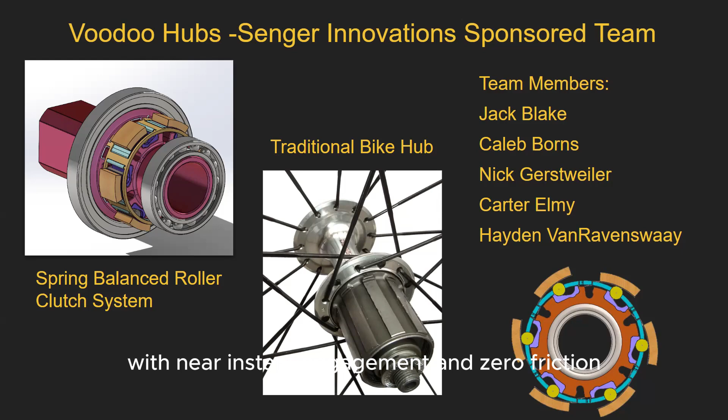The end goal for Senger Innovations is to create a real bicycle hub that is competitively priced in the high-end bicycle hub market, with near instant engagement and zero friction. This would target cyclists in competitive mountain and road biking. Achieving this goal is a long process, and we have been happy to help along the way.

This past year, our team has worked on further developing different testing methods for the bicycle hub with drag, life cycle, and sound testing, as well as computational models for the dynamics of the hub. This has included a lot of research in components, learning how to develop code to run tests, and many different design changes to accommodate for the high loads during life cycle testing.

Our members have also focused on dialing in proper sound testing procedures to reduce resonances and variables to isolate sounds produced by the hub. We are looking forward to continuing to help Senger Innovations by conducting more validation testing and computational models to make sure this product gets to market.

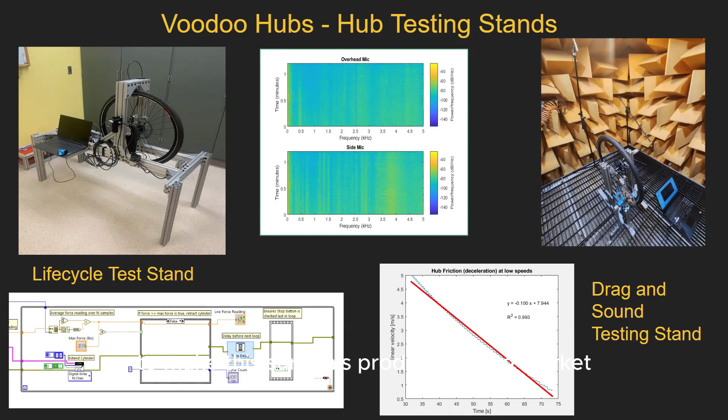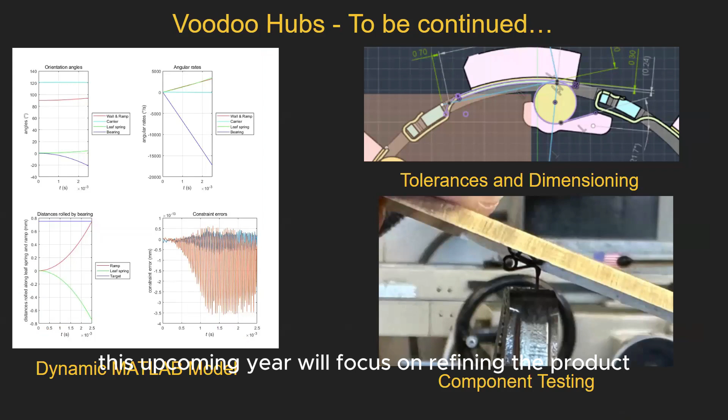The future scope of this project is to have a fully functioning prototype by next year with the help of MATLAB dynamic models, advanced machining, and tolerancing. This upcoming year will focus on refining the product and putting it up against some of the high-performance hubs already on the market. Following testing, the team will improve upon the design, get ready for rider testing, and manufacturing for the market.

The Trailblazer team was formed this year. Starting over the summer of 2023, we began this project by completing customer discovery interviews with local UP trail builders in order to identify common issues that contractors often encounter, in search of an engineering product and solution which would later be suitable to bring to market. The issues that often arise are transportation and mobility of essential components such as tools and fuel. This issue set allowed us to focus our sights on designing a trailer for deep forest trail building.

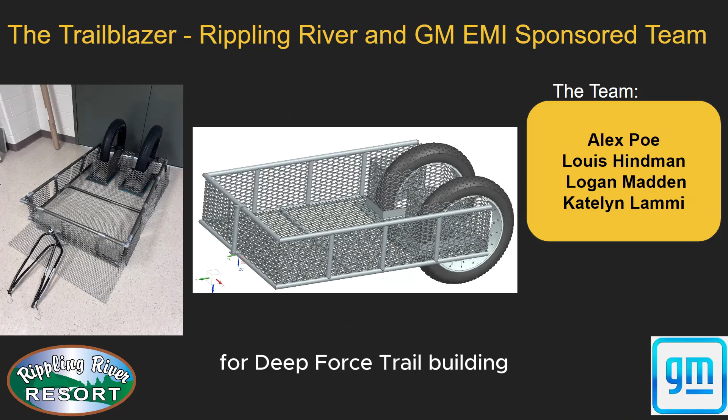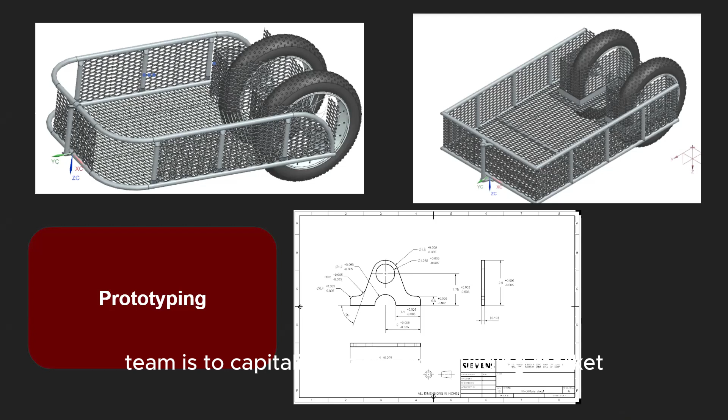The Trailblazer team today includes 4 mechanical engineers, myself, Logan, Louis, and Katelyn, who share a goal of creating a maneuverable, durable, and easy to maintain bike trailer. With commercial bike trailers often designed solely for road usage, utilizing only a singular wheel with small body frames, they often lack trail mobility and adequate storage space, while also costing between $400 and $800. The goal of the Trailblazer team is to capitalize on the trail building market with a cheap and reliable product targeting the labor market who will be able to benefit from our project.

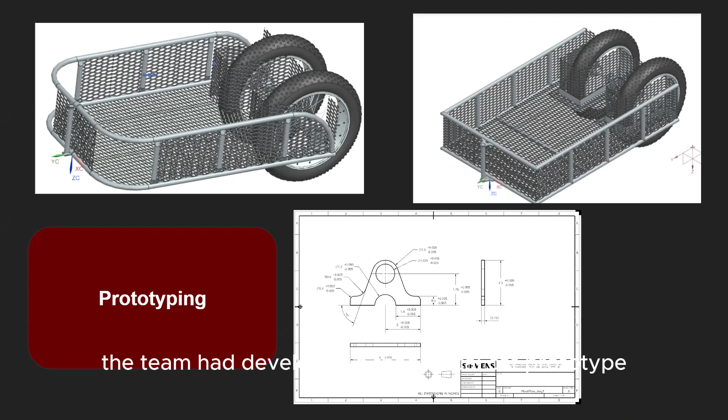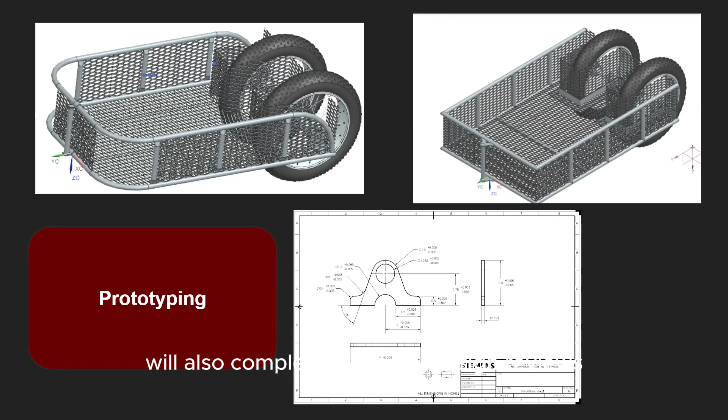By the end of the 2023 semester, the team had developed a theoretical CAD prototype. However, throughout the semester, our team faced a series of challenges due to a lack of efficient design experience, which would prove to be a rather large learning curve. As a result, our designs would often be faulty or unable to be manufactured. To counteract this issue, our team would reach out to both university faculty and our advisors at General Motors for feedback and advice, while also completing internal design reviews, allowing us to review each other's work and identify potential issues before we manufactured.

This spring semester, the Trailblazer team shifted our attention from research and development to manufacturing the proposed design. This in turn saw us completing engineering drawings, allowing us to machine necessary parts. However, this shift in focus would generate some problems for our team, as not every part was feasible to manufacture within the Michigan Tech facilities.

One such example is represented in our initial proposed idea for our trailer's frame, which was supposed to have 2 90-degree bends in order to create a bent frame. However, we realized no machine at the university or any local manufacturer would be able to produce such bends. As a result, we needed to redesign our prototype to be composed of 2 45-degree cuts instead. This would prove to be a satisfactory result. As of finals week in the spring semester, the Trailblazer team has fully machined every component present within the prototype models and has shifted our focus to completing the weldment of the trailer frame, with a final product expected by Design Expo.

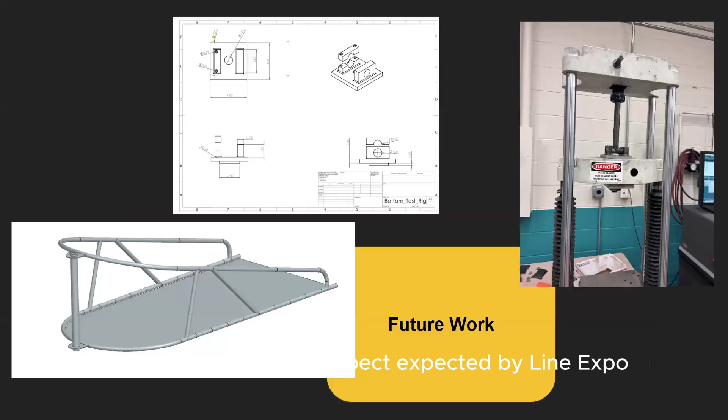The Trailblazer team has no shortage of future work to undertake. Starting off next fall semester, our team plans on completing rider testing at Michigan Tech trails to determine how well the trailer handles and possible adjustments that would need to be made. This will entail riding on cross-country and downhill trails with some parking lot testing to determine how well the trailer

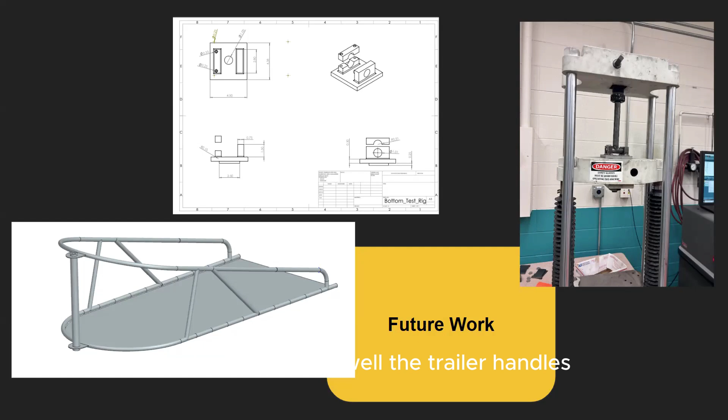handles. Further work will include researching material change from our current standard bike steel to aluminum in order to reduce overall weight, while also researching tensile testing and other joint connection methods.

Our third enterprise team, composed of mechanical engineering majors Ben, David, and Cooper, is tackling a common frustration for cyclists and bike mechanics: messy and time-consuming hydraulic brake bleeds. Enter ABBA, their innovative solution that automates this process.

Most modern bikes rely on hydraulic brakes, offering fantastic performance. However, bleeding them can be a nightmare for both professional mechanics and home enthusiasts. ABBA solves this by automating this process, making it quick, clean, and user-friendly. This portable, battery-powered device utilizes a clever peristaltic pump. It gently pushes fresh fluid through your brakes, eliminating air bubbles and ensuring optimal performance.

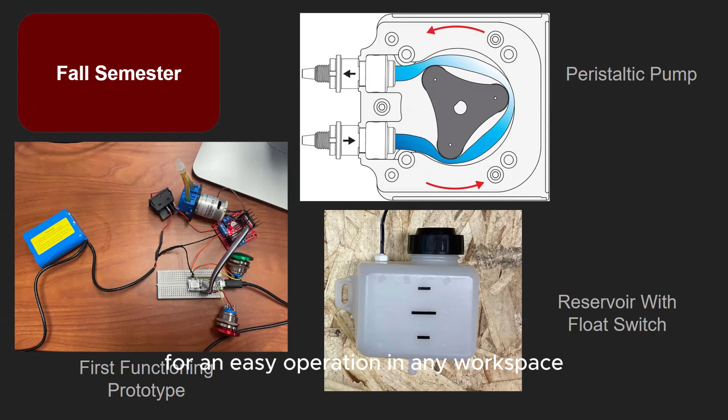Connection is simple, just attach the hoses to the bleed ports and press the start button to go. ABBA utilizes a pre-programmed cycle time of around 35 seconds and a float switch to deliver the perfect amount of fluid automatically. No more mess, spills, or wasted time. ABBA isn't picky about brakes. It's designed to handle a wide range of brakes and fluid types, adapting to various brake bleed procedures. The compact design even mounts conveniently to your bike's handlebars for an easy operation in any workspace.

To further enhance the functionality, the team is exploring features like retractable bleed lines and compressed air purging. Bike shops can significantly boost service efficiency with ABBA, while home mechanics can finally perform high-quality brake bleeds with confidence. Say goodbye to frustration, hello to clean, user-friendly brake maintenance. This exciting project is well underway with a successful prototype. Future iterations will focus on optimizing bleed times, minimizing fluid waste, and ensuring long-lasting performance through hose lifecycle testing. Stay tuned as ABBA continues to evolve and revolutionize the way cyclists maintain their bikes.

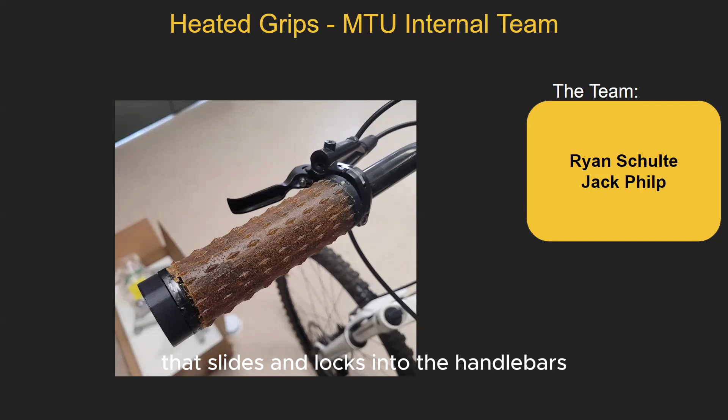The fourth and final Velovations team is Heated Grips, or Hot Paws. The team includes Ryan, who develops the mechanical parts, and Jack, who develops the electrical components of the grip. The goal of this student-ideated project is to create heated bicycle grips that are powered by rechargeable batteries, allowing the user to extend their riding season into the colder months. This is achieved by placing the battery and electrical components in a center core that slides and locks into the handlebars, creating an electrical contact with the heated elements in the grip.

During the fall semester, the team continued innovation of the existing prototype, starting with trouble releasing the grip from the 3D printed mold that was previously used creating the grip. The diamond pattern of the grip caused perpendicular release angles between the grip and the mold. To alleviate this, the team switched to a silicone mold, allowing for parallel release angles for all parts of the grip, which was assisted by the use of mold release. Additionally, the team innovated on the printed circuit board, or PCB, that they had previously created to allow the most power into the grip while minimizing the size of the board.

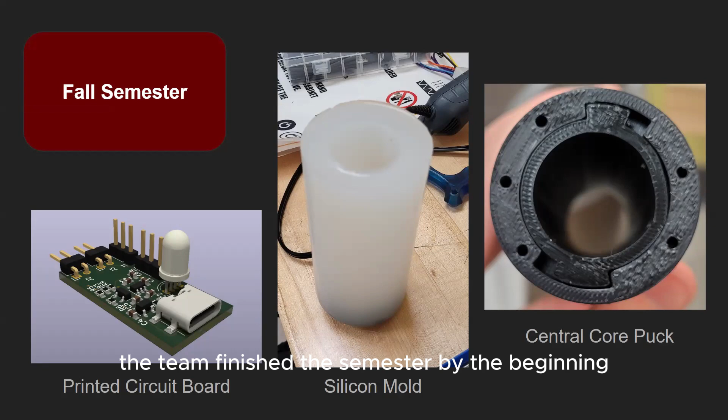Finally, the team finished the semester by beginning sizing of the central core using a small puck for general tolerances and dimensioning. The dimensioning was completed in the spring of 2024, allowing for the continuation of the CAD of the core. Spaces for the batteries and the circuit board were added, as well as a hole on the end for the USB charging cable. The PCB was also updated after it struggled to handle power requirements. Using a boost converter, the PCB was able to output more power and properly heat the grip. Finally, the functionality of the PCB was tested, ensuring a working grip for differing temperatures, and the LED correctly indicates the different power levels and battery status.

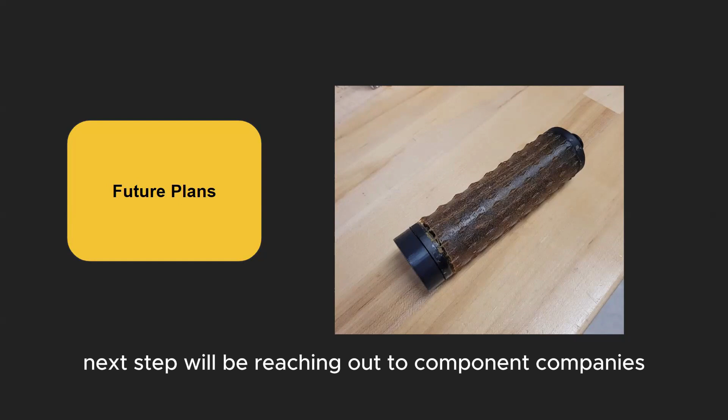The future of this project will take Hot Paws in different directions than before. The completion of a fully operational prototype will see slight improvements in the design, including design changes for ease of manufacturing. Yet the biggest next step will be reaching out to component companies to see if they would like to help continue this project to the market. All members of Hot Paws are graduating this spring, so the continuation of this project will be decided by future members of Velovations. Hot Paws' working prototype offers a comfortable grip for year-round commuters, and they hope others will be able to enjoy warm hands while biking.

Velovations is an enterprise open to exploring any project that revolves around biking. We are proud of the work this year's 4 teams have done, and we look forward to what the future of Velovations has to offer.